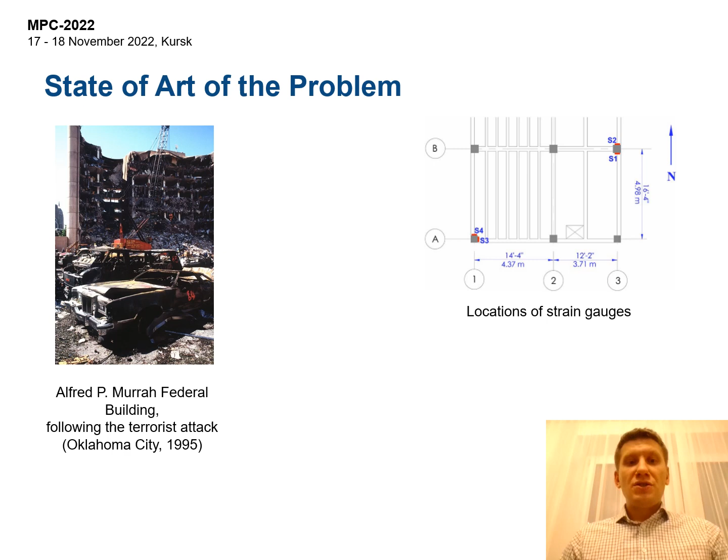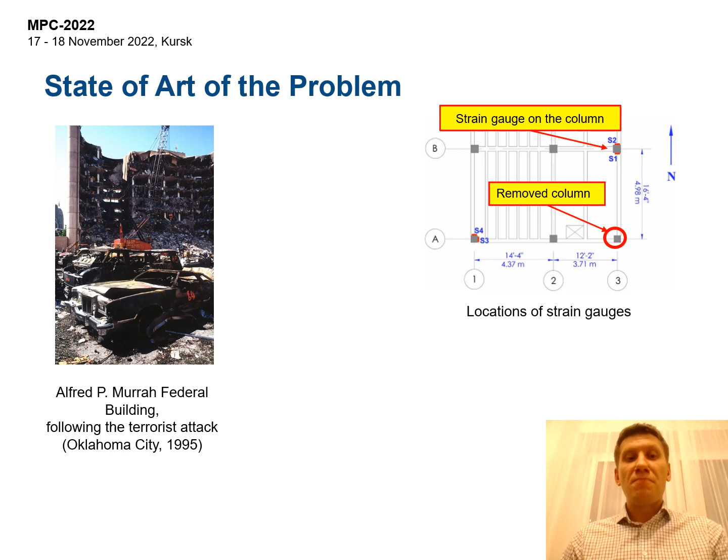Although the phenomenon of progressive collapse is not realized so often in economically developed countries, its consequences can be catastrophic. For example, during the collapse of the Alfred P. Murrah Federal Building in Oklahoma City in the USA in 1995, the shutdown of one of the columns of the building as a result of the explosion led to the collapse of a significant part of the building and dozens of casualties.

Analysis of the graphs of changing strains over time obtained in the studies of removing the corner column of the reinforced concrete frame of a building under demolition showed that after 0.069 second from the moment of accidental impact, on the opposite faces of the neighboring column of the extreme row, the deformation exceeds by 1.875 and 1.363 times the values recorded after the damping of oscillation in the building system.

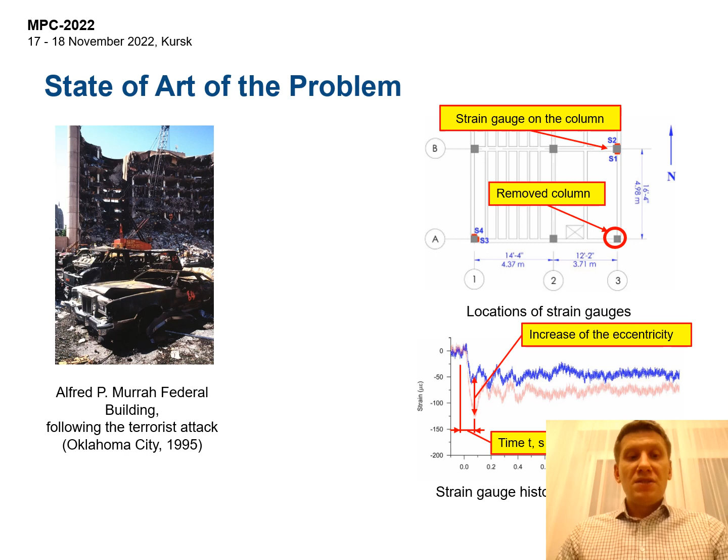This allows us to draw two important conclusions from the point of view of assessing the nature of redistribution of the force flows in the carrier system after the initial local failure. First, sudden failure of the bearing element of the system, so-called initial local destruction, leads to the occurrence of dynamic effects in the structural system.

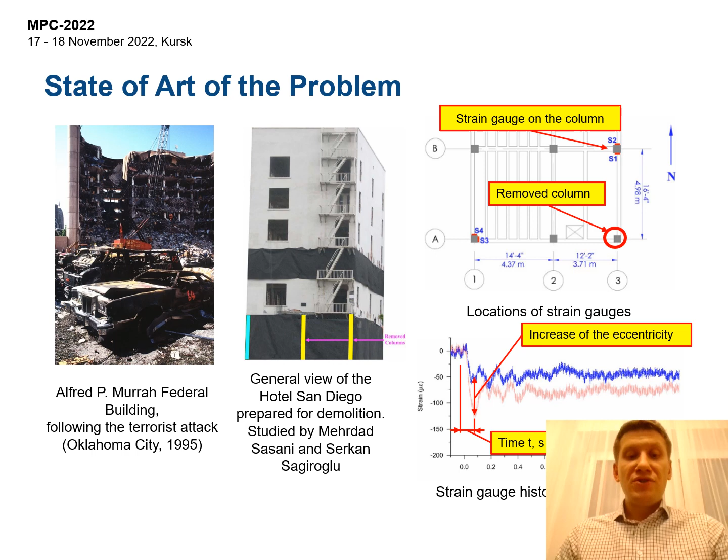Second, during the structural redistribution of the carrier system due to the failure of one of its elements, there is a qualitative change in the stress-strain state of the elements. In particular, in addition to loading by axial force, there is an increase in eccentricities of this axial load.

The purpose of the present study was to substantiate experimentally and theoretically the parameters of impact on the reinforced concrete frame of the building in the event of a sudden removal of one of the load-bearing elements of the structural system, as well as to analyze the mechanism of destruction of the considered frame associated with the stability failure mechanism, and substantiate the criteria for assessing such a failure mechanism.

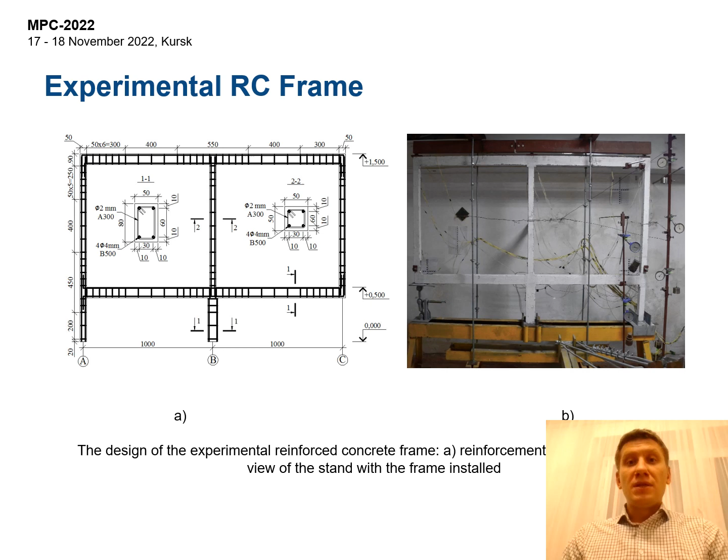For the purpose of the study, a two-story reinforced concrete frame was designed and manufactured. The design of this frame was selected based on the data of preliminary numerical simulation. The composition of the concrete mixture was selected from the condition of obtaining concrete of B25 class by compression. Reinforcement of the frame elements was carried out with spatial frames with a symmetrical arrangement of longitudinal reinforcement. The fabricated reinforced concrete frame structure was installed on a test stand.

The conditions for fixing the columns on the first floor of the experimental reinforced concrete frame on the stand were fixed hinges, while the possible displacements of the frame from its plane were limited by means of bilateral linear ties in the upper nodes of the frame, which allow free deformation of the frame in its plane.

Testing of the physical model of the reinforced concrete frame was carried out in two stages. At the first stage, a gravitational load was applied stepwise in 10 steps at the nodes of the experimental model of the structural system. At the second stage, a special device was used to simulate the instantaneous removal of the corner column on the first floor of the scale model of the reinforced concrete frame.

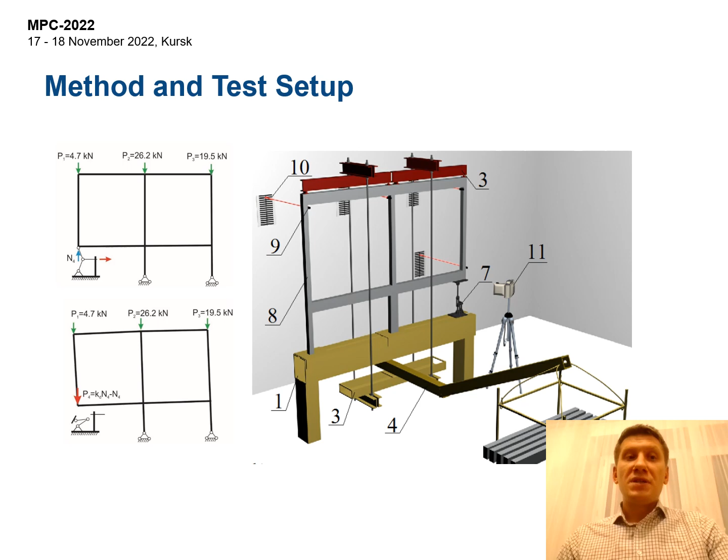0.133 seconds after the triggering of the device simulating the instantaneous removal of the corner column, the contact between this device and the joint of the experimental frame was lost. After that, in the time interval between 0.133 and 0.167 second, a change in the direction of displacement of the considered frame joint was observed.

Starting from 0.83 second, there was an intensive increase in displacement of the considered frame joint, which at 1.167 second after the start of the accidental impact was accompanied by destruction of the central column at the second floor of the experimental frame.

Based on the results of video recording of the deformation of the reinforced concrete frame, a graph of the vertical displacement of the beams junction above the device simulating its instant removal from the structural system was plotted.

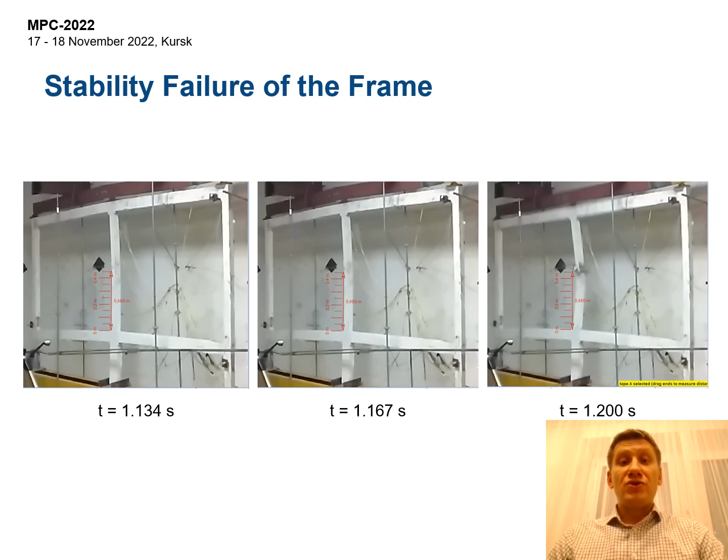To estimate the reaction redistribution time of the removed corner column, numerical simulation was performed using a finite element bar model, which included the design of the experimental frame and the lever load system. According to the results of the numerical simulation, a pattern of deformation of the reinforced concrete frame similar to the experimental one was obtained for the following accepted parameters of the impact and the stiffness of the structure's elements.

Coefficients 0.6 and 0.3 were accepted for the stiffness of structural elements. This takes into account the nonlinear nature of the deformation of columns and girders, respectively. The time of the redistribution of the reaction of the removed corner column was accepted as 0.1 second. This is practically 0.1 of the period of natural oscillation of the frame, according to the lowest mode corresponding to the experimentally established deformed state of the frame in the first half wave of the oscillation.

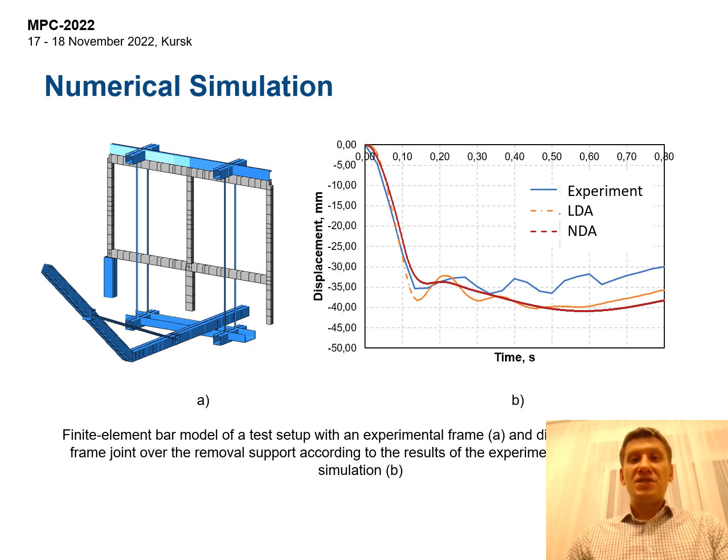The nonlinear dynamic and quasi-static analysis using the finite element bar model in deterministic formulation made it possible to reveal a fracture form similar to the experiment when a perturbation from the frame plane is specified in the form of a node displacement in the middle of the column by 0.184 of the height of the column cross section. As a criterion for evaluating this failure, the increment stiffness was accepted.

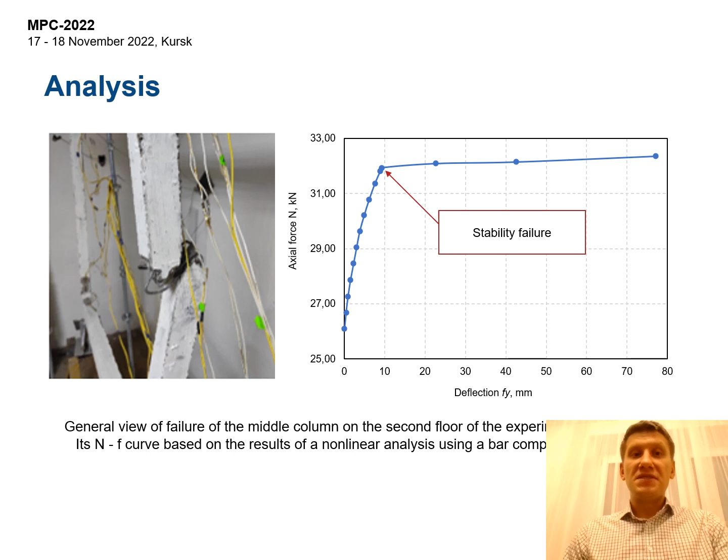Conclusions. In the present study, an experimental and theoretical substantiation of the parameters of impact on the reinforced concrete frame of a building in the event of a sudden removal of a load-bearing element of the structural system, as well as an analysis of the mechanism of destruction of the considered frame associated with the buckling or stability failure mechanism, and the substantiation of the criteria for assessing the onset of such destruction were carried out.

Numerical and physical modeling of the emergency situation in the form of an instant removal of the corner column from the reinforced concrete frame was performed. It was found that the exhaustion of the bearing capacity of an eccentrically compressed element of the structural system can be caused by the stability failure mechanism. As a criterion for evaluating this mechanism, reaching the zero value of increment stiffness of this element can be accepted. Thank you for your attention.